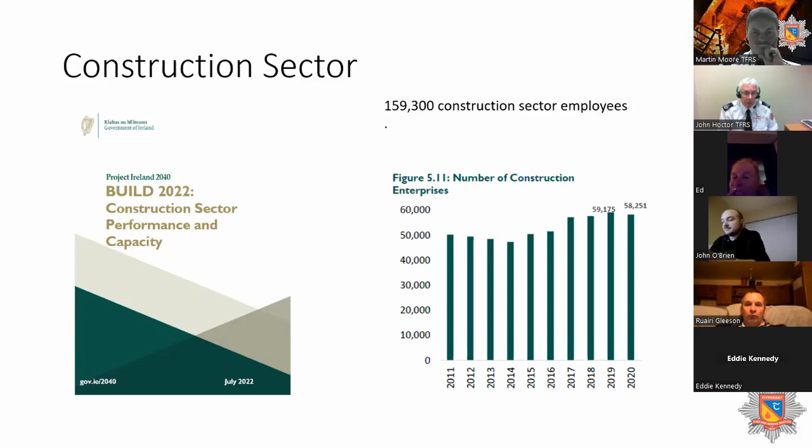A little bit of history in terms of regulation. There's nobody here who would want to talk regulations as their favorite subject, but I've taken London as an example. In the 12th century, there was a major fire, and they banned thatch roofs within the city boundaries. 400 years later, in 1666, they had another big fire, and they banned timber construction within the city boundaries - all houses had to be built in stone and brick.

By the 1850s or 1860s, they had typhoid and cholera outbreaks in London, and they brought forward more regulations around sanitation and water supplies. They brought in a full suite of regulations for not just London but all of England in 1966, and they stayed in place with some exceptions and increases. But then in June 2017, Grenfell Tower happened, and there were 72 fatalities. Coming out of that, five years later, they've enacted a Building Safety Act, and a lot more statutory instruments and guidance.

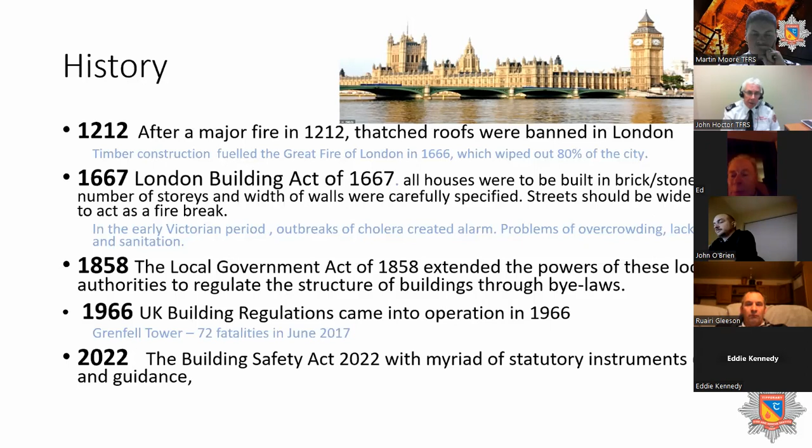Grenfell Tower was a large, complicated building, and what we're really talking about here tonight are dwelling houses, and that's really the focus here, but it gives you an idea of where regulations have come from.

The other issue is that regulations aren't just in Ireland and England. If you go to any developed economy, whether Europe, Canada, America, Australia, they all have regulations, and they all have the same type of regulations. On occasion, we'd look at fire regulations in some of those jurisdictions that are quite similar. But it's not just within the developed world.

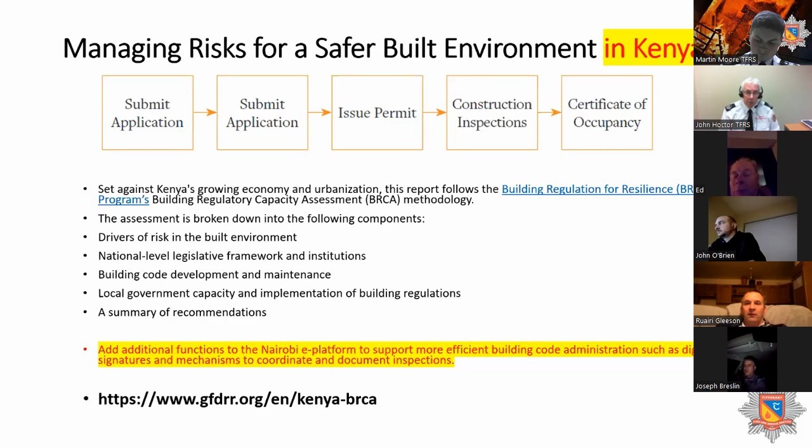Take Kenya, for example - this is a World Bank report. Their process: submit the application, issue the permit, construction inspections, and cert of occupancy. They actually have an e-platform, a BCMS equivalent, in Nairobi to allow people to go along and lodge documents and document inspections. So building regulations are part and parcel of what's happening worldwide.

In Ireland, we were slow in terms of bringing in regulations after the state was founded. We brought in planning permissions back in 1963, and then in 1990, the Building Control Act was enabled. These are Irish regulations written and passed through Dáil Éireann, for Irish people - they're not being put together by somebody from the outside.

Building control regulations cover the fire safety certificate, the commencement notice, disability access cert, and since 2014, the certificate of compliance on completion for all buildings, with the exception of the opt-outs for dwelling houses and agricultural buildings. Building regulations are a set of expectations in terms of fire, structure, hygiene, access, and then there are technical guidance documents that give details of what should happen on the ground in terms of buildings.

The regulations, if you go back 400 or 500 years ago in London, were very prescriptive. No thatched roofs, no wooden structures within the city of London. That's now changed, not just in that jurisdiction, but right around the world. They tend to be performance-based. So you can now have a thatched roof in Ireland, but it has to be 6 meters from the nearest building. So the regulations are more performance-based. It's not simple black and white rules anymore.

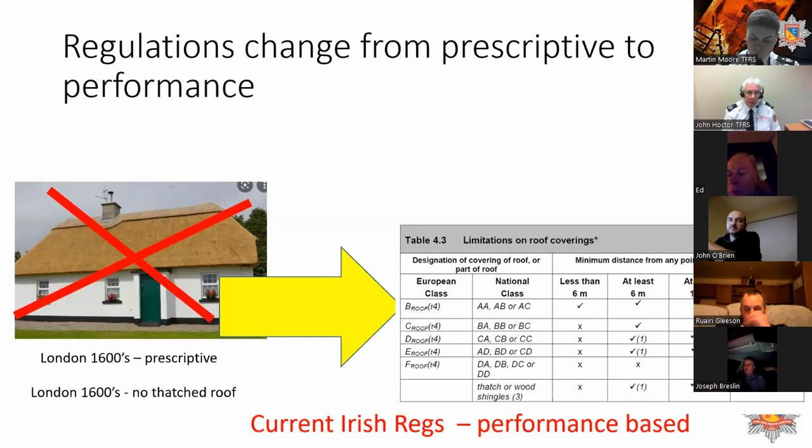Why are we doing this? And Dave mentioned it as part of his introduction. In Ireland, we had historically 40 to 45 to 50 deaths a year. We're now down in the late teens, early 20s.

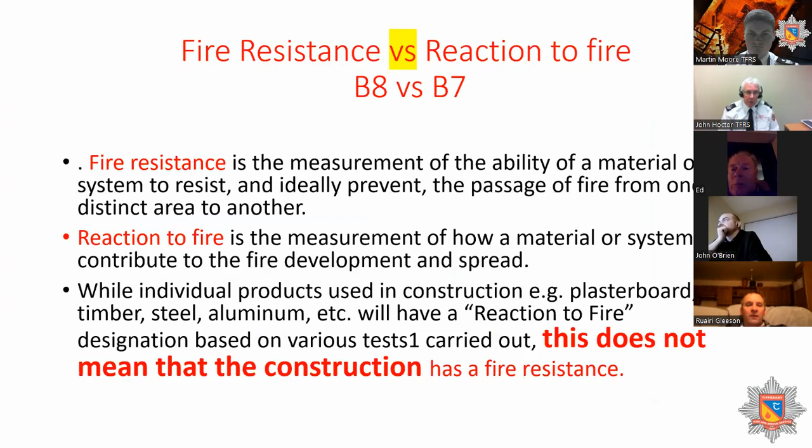Building reaction or fire resistance, fire reaction. There's definitions here, but I'll go on to the next slide to talk to it. Our concern is, not merely talking to professionals in the construction sector, but when we go out to do licensing inspections in the hospitality sector, they tell us something is fire rated. The reality is it either has to be fire resistant or have a reaction to fire.

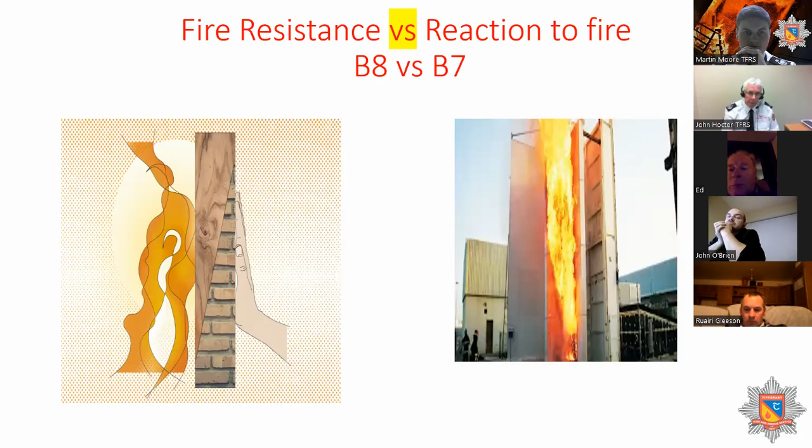Fire resistance is essentially that the wall will either withstand the fire for a duration, stop the flames coming through or the smoke coming through, and stop the heat coming through. Reaction to fire is that if you light a fire lighter at the bottom of the structure, if it's made of concrete, the fire won't go up along the structure. If it's polyurethane or PVC, like it was inside Grenfell Towers, the sad reality is the fire has traveled very, very fast.

So a little bit more detail here in terms of the actual fire resistance. It's not just fire resistance, there's a designation of resisting in terms of load bearing capacity, integrity, and insulation. Load bearing capacity means that if the fire is here, the wall will stand for 30 minutes or 60 minutes and won't collapse, but it doesn't mean the fire won't go through the wall. If it's got integrity as part of the designation for 30 or 60 minutes, the flames won't pass through the wall, or the hot gases or smoke won't pass through, but you will still get some heat transmission through the wall itself.

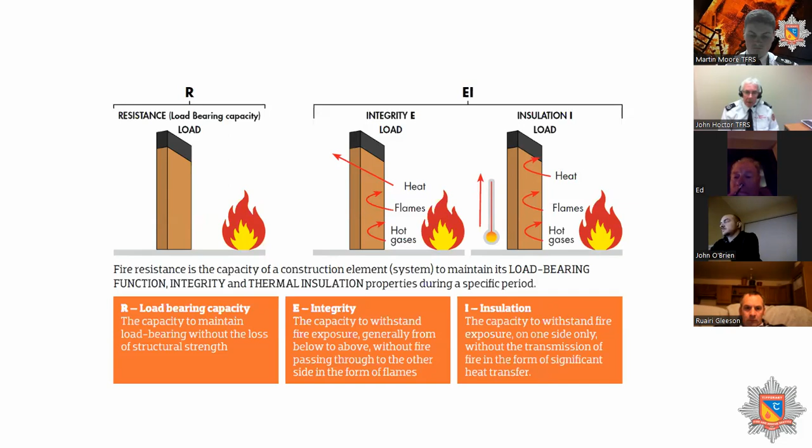The last one is, if it's got an insulation rating, the hot gases will be held back, the flames will be held back, and the heat will be held back. So on the far side of the wall, you would be actually unaware the fire was happening because of the integrity, insulation, and resistance of the wall itself.

In terms of reaction to fire, again, it's not just simple, it's fire rated or it's got a fire reaction rating. A1 is non-combustible, so it could be plasterboard or a concrete block. And then you've got polyurethane and polystyrene. And all the way in between, you can use them in some circumstances, but the regulations tell you when you can use them, when you can't.

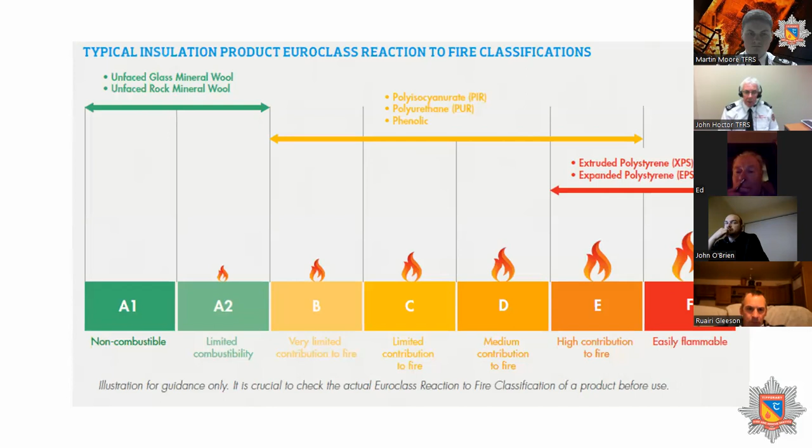So in terms of looking at the actual fire, particularly for dwelling houses, I want to step back and use a different analogy. Take a Scania tractor unit that's bought from Scania, that gets converted into a fire appliance. The way that runs essentially is that the tractor unit is purchased and it then goes to a bodybuilder who puts in the water tank, the lockers, the pump behind it, as well as putting in space for ladders on top.

If that's done in Ireland, it has to be built by an approved vehicle bodybuilder scheme, governed by the NSAI, the National Standards Authority of Ireland. They've got a code of practice, purchasing requirements, drawings, and control plans. The detail is here on it.

I suppose what I'd be suggesting to you essentially is that the construction sector is becoming more and more like an assembler of approved items rather than building from scratch.

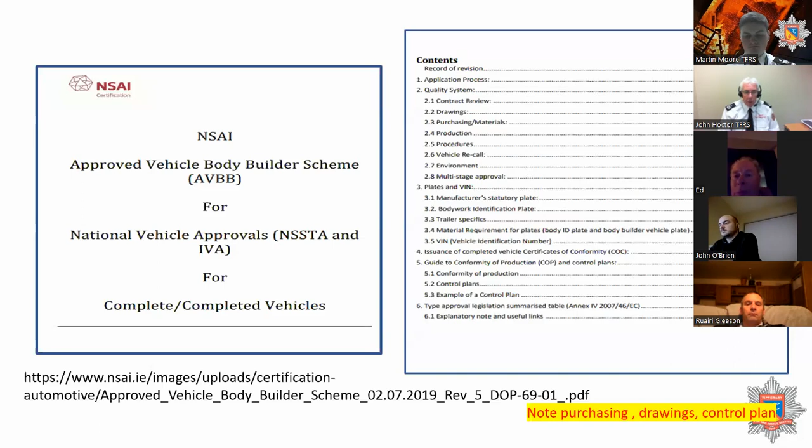So the technical guidance documents, there's a lot of documentation out there, and we're very conscious of that within the actual sector. Within Ireland, we've got 12 guidance documents, A for structure, going down as far as M for disability. We're going to talk about one of them here, which is technical guidance document B, volume 2, building regulations, technical guidance for dwelling houses. The link is here if you want to take a look at it.

In terms of volume 2 for technical guidance document B, if you follow the guidance in this document, you've got prima facie compliance, legal compliance with the actual building requirements. It's a bit like the seatbelt - if you put on your seatbelt, you're obeying the law. Again, if you follow the guidance here, you're obeying the law. And it's a minimum standard, so nothing precludes you from going higher than that.

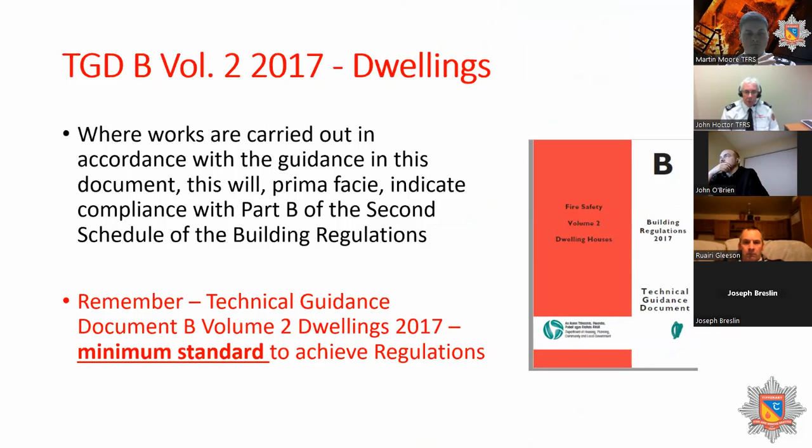What's in the document, and these documents run to about 100 pages, so the 12 documents could be 1200 pages of guidance documents. There's 5 sections, B6 to B10. B1 to B5 are for commercial buildings, so we're just talking about domestic dwellings here, covering B6 to B10. B6 talks about there has to be fire detection now within buildings.

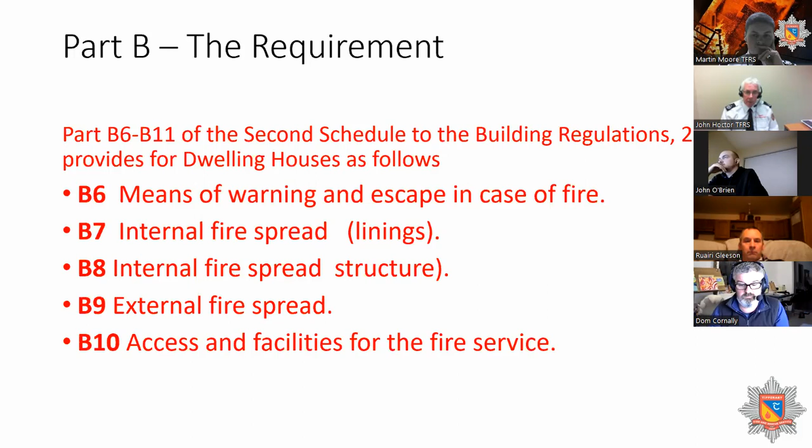There has to be means of escape, not just windows, but doors. The internal linings - you can't go along and have polyurethane as internal linings because it'll let a fire spread very easily. In terms of structure, the structure has to have integrity in terms of standing, and if there's cavities in that structure, it has to make sure cavities don't allow the fire to travel very easily. External fire spread, for example a thatched roof, you have to be sure that what we're building won't allow the fire to spread rapidly to other dwellings. And finally, access to the fire brigade.

On top of that, there's what's called supplementary guidance. If all houses were built of stone construction like they were maybe in the 17th or 18th century, they were very fire resistant. Today we're using a lot of timber framed and modular construction. This guidance here gives you supplementary guidance on how you should comply with the actual technical guidance document. And if you build in accordance with this requirement, then you're in accordance with the European test methods - all the guidance here has actually got detailed fire safety testing within test houses right across Europe before it was published.

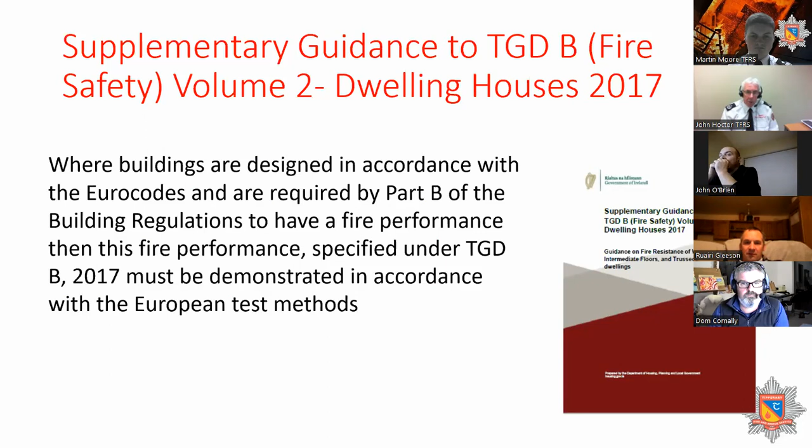In terms of fire resistance, which is probably our primary concern when looking at dwelling construction, there are probably 3 numbers people need to be aware of. The first one is REI 60 - that means there's a red line in the drawing typically, indicating 60-minute fire resistance for load bearing capacity, 60 minutes for integrity, and 60 minutes for insulation. Two other designations you'll see are REI 30/15, meaning 30 minutes for resistance and integrity and 15 minutes for insulation. And then the blue line is actually 30 minutes for all 3 - REI.

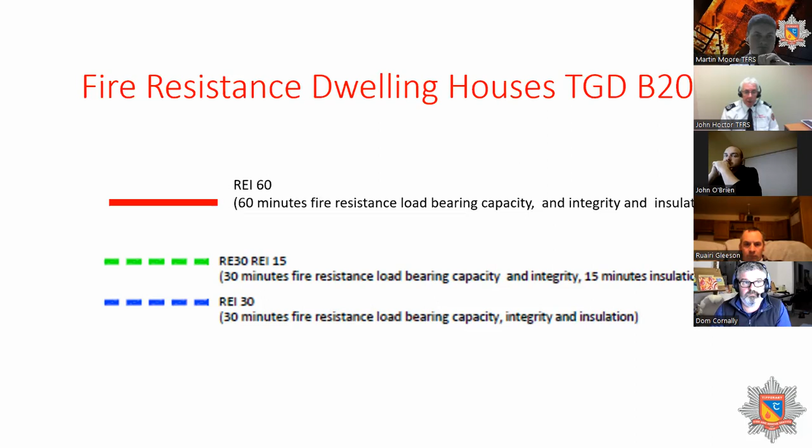So what does that look like? Take here a 2-bedroomed semi-detached house, entry door here on this side, sitting room, kitchen, and a stairs up to the bedroom. You then have a party wall here, and at the other side of the wall, another 2-bedroom dwelling. There's a red line down through the middle, indicating the party wall should be 60 minutes fire resistance for load bearing capacity, integrity, and insulation. If that's built out of concrete, you get that as part of the deal. If you're building a frame construction, using this guidance document tells you how to comply, so you get 60 minutes here. And I'll talk about the requirements if you step away from this document in a second.

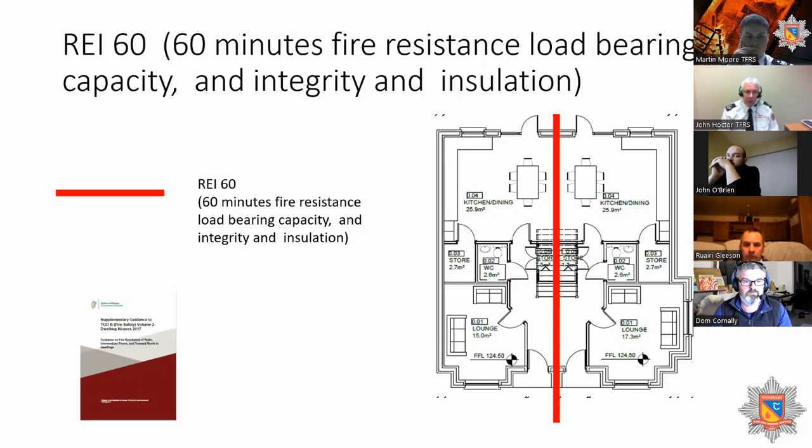If you've got a dormer bungalow, standalone, then there also are requirements here. You can see the dotted green line means you should have REI 30/15. So that means if the fire starts in the kitchen, the bedroom should be separated from the kitchen by fire resisting construction.

That should stop the fire from transmitting in terms of the load, the floor falling down for 30 minutes. It should stop the heat and smoke transmitting into the bedroom for 30 minutes. And then for 15 minutes, there should be no transmission of a warmer temperature up through the floorboards into the actual bedroom. That allows people to get out.

And you can see that requirement here is not just for the floor between the kitchen and the bedroom, but also in terms of the actual structure of the attic and the structure of the other bedrooms or other living areas downstairs.

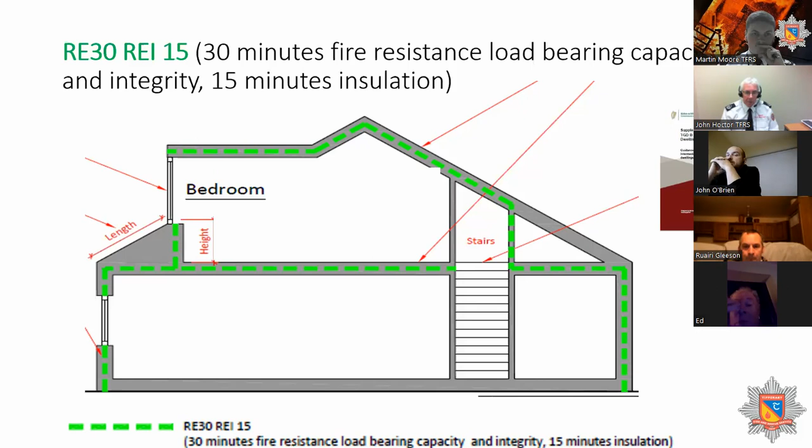So if we decide to step away from the ancillary guidance document for frame construction, or from concrete, then you're looking at substantiation. For concrete, it's very easy here.

This is an extract from one of the actual vendor sites. You can see here that if you use a 4-inch block, 4.5-inch, or 6-inch block, you get a 1 hour or 2 hour rating. And the key issue for concrete construction would be the cavities, making sure there's fire stopping in the cavities, and then the openings, which Martin will talk to, because if you actually start opening up the walls or floors, that causes problems in terms of fire transmission.

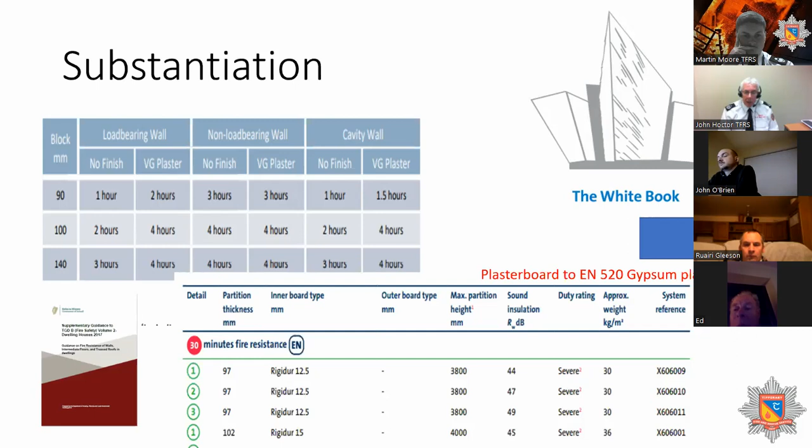If you've got stud construction, then if you step away from this guidance document or ancillary guidance, you're into looking for substantiation from the vendors. This is a well-known vendor here, the White Book - 30-minute fire resisting construction, 12.5 mm board, and you can look at the substantiation behind it in terms of the stud build-up.

Posi joists, again, a lot more common within construction now because of all the ventilation and other ducting requirements happening in dwellings. This table is a bit detailed, but just to give you an overview, it's the fire resistant tests that have been completed.

You can see here on the left-hand side, they're all REI 30, so they're all getting 30 minutes across all 3 characteristics for fire resistance. If you go over to the right-hand side, you'll see the actual tests have different times in them. This test here was done at 55 minutes before it actually stopped without failure. This one achieved 36 minutes, and this achieved 42 minutes.

But the difference here is that the testing on the top line was done to BS 476. The testing in the bottom line was done to EN 1365. And the key issue essentially is that the new standard requires us to build dwelling houses in accordance with EN standards. The BS standards are only there for existing dwellings.

And if you look over here, it gives you details in terms of joist centers and the joist depths, and then the screw fixings. And the report is over here - so there's a substantiation report that actually goes through here.

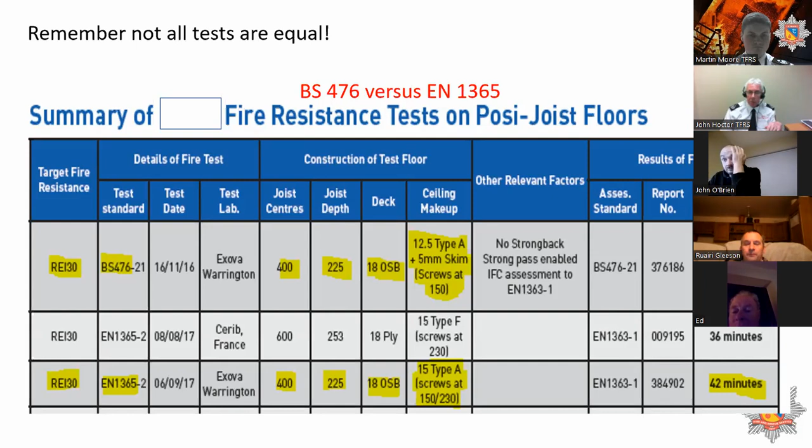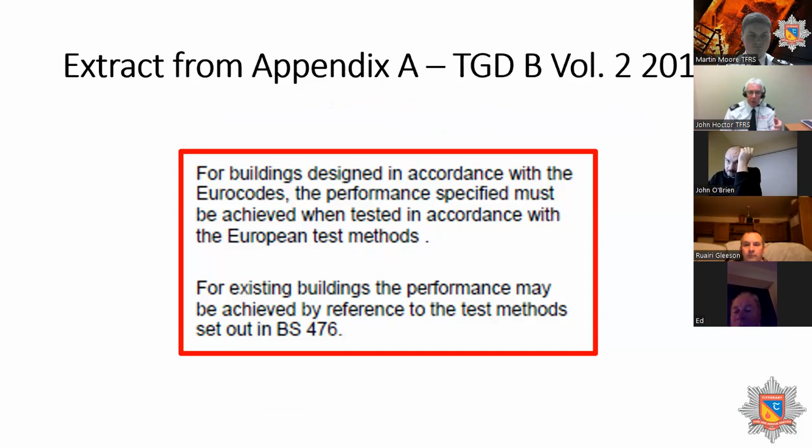This point here, I think I already made, that new dwellings are to Eurocodes, existing dwellings are to the old British standards, the 476 testing. So a test report, and again this applies if you're stepping away from the supplementary guidance - you've got to go along and look at the details.

This is a test report that was done in a test house in the UK. It was done in accordance with the European standard 1365. It was looking at a timber floor with downlighters, with a 15 mil slab, 225 mil joist at 600 centers, with 22 mil tongue and groove chipboard above. And then they put in 7 downlighters into it.

And I suppose the key issue here in terms of fire safety is that if you go along and put in a concrete floor, you can say you get 60 minutes. When you start putting in frame construction with downlighters, the only way you can prove that is by bringing it to a test house and showing that it actually works.

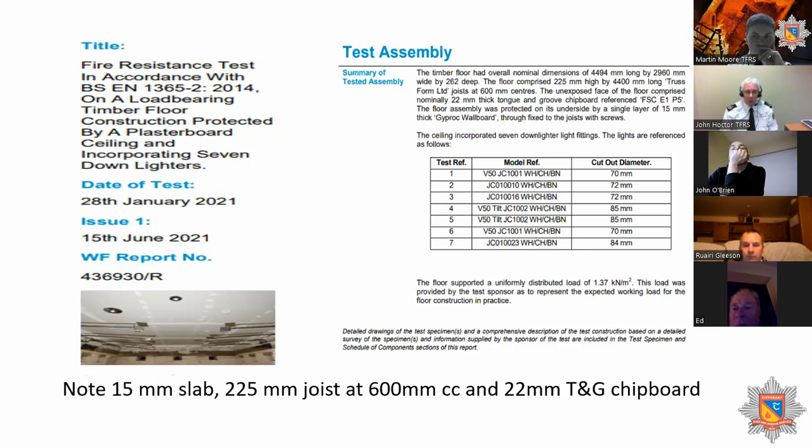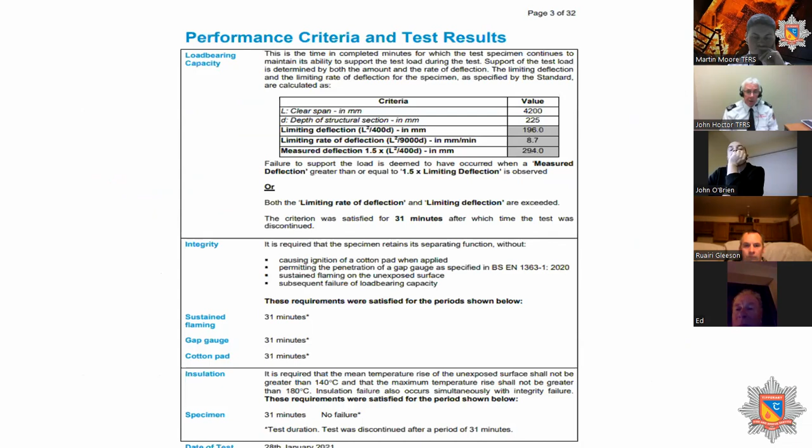So the test report here shows that it passed load bearing capacity at 31 minutes. It passed the integrity requirements at 31 minutes. And it passed the insulation requirements at 31 minutes. So the detail is there. The report runs to 32 pages - I've just taken a sample out of it. And this is the sign off on it.

And one of the key issues here is that you can't take a report in isolation. You need a full report, and the link is there. And you only need to go to this level of detail if you step away from the guidance that is provided in the supplementary guidance.

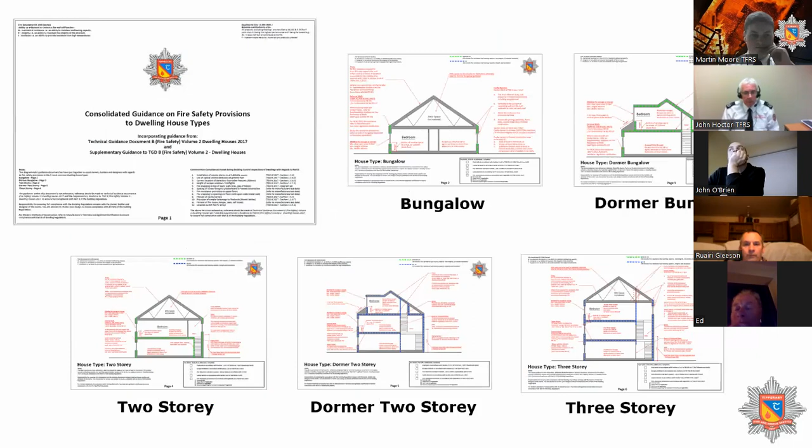So that concludes my regulatory overview. What I'm going to do now is hand you over to Martin Moore, my colleague, and he'll go through some of the actual on-site technical specifications. Thanks, John. As John said, I'll share my screen with you here now, guys.

So as John has alluded to, he's gone through the regulatory pieces and the test information. What I want to get into now is the nitty gritty of it, the technical advice with regards to the details, the junctions, the fire stop, and how all that goes together.

So if you have any questions as we go on, please use the chat function here in Zoom and ask us whatever questions you want, or contact us afterwards. Anything we can't answer during the Zoom call, we'll come back to you with an answer.

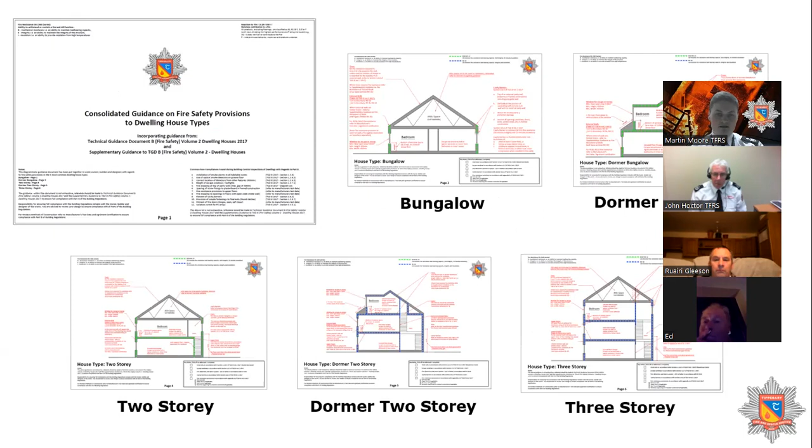As Dave alluded to at the start of the presentation, what we've been working on is a consolidated guidance document for Technical Guidance Document B, Volume 2, and for the supplementary guidance. There's a substantial amount of guidance out there, and it's knowing where to find it that you can get bogged down in. So the idea behind this document was to streamline it all.

You will effectively just have to go to this document for the most common house types we see in Tipperary, your bungalows, dormer bungalows, two stories, dormer two stories, and three stories. It will effectively tell you what type of fire resistance you need, what kind of escape provisions you should be providing.

The idea was to create something similar, almost like the ACDs. I suppose they're not exactly details, they're diagrams of the houses, but I think we all kind of think in that way. It's quite a handy little fact sheet that you can hand off to subcontractors or other designers and say, this is my bungalow, these are the base level fire safety provisions that I need to be providing.

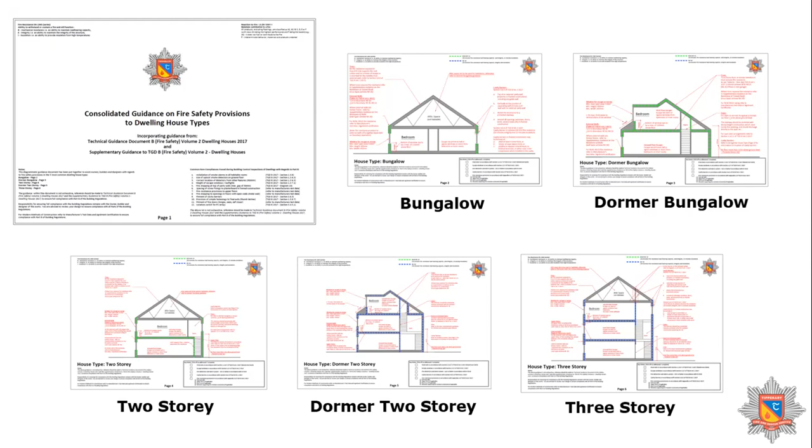So take, for example, the bungalow dwelling. Obviously you've got a truss there that's not doing anything in terms of a means of escape, and we're assuming it's not supporting the external walls, so it doesn't require fire resistance. You've got your external walls — in a bungalow situation, if you're more than 1 meter away from the boundary, RE30, REI15 is adequate.

Now, even when it comes to the supplementary guidance, any of the scenarios, the wall types, truss types, or floor types tested, they all achieve REI 30 — the full 30 minutes fire resistance.

TGDB is lacking in terms of RE30, REI15 — there's not many manufacturers out there even going to provide you test certification for that. They're all going to aim for the higher value, purely based on the cost of the tests involved. So the majority of results and build-ups out there will actually achieve the full REI 30, but it's always worth checking.

So if you are wondering what does achieve RE30, REI15, talk to the manufacturers, check out the Agrément certificates for the products you're planning on using. As I said, these are not going to catch everything — they're the base level of fire safety. You still need to review Technical Guidance Document B Volume 2, and the supplementary guidance, but this is just to give you a very quick overview of when you need cavity barriers, when you need to look at fire resistance of external walls, items like that.

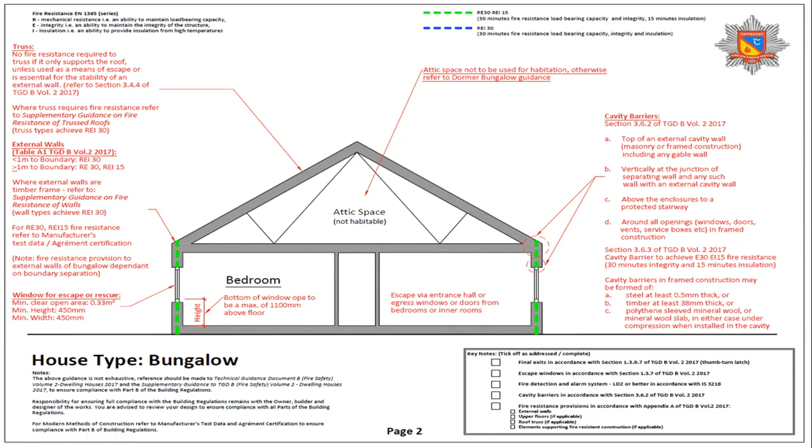Go on to our dormer bungalow.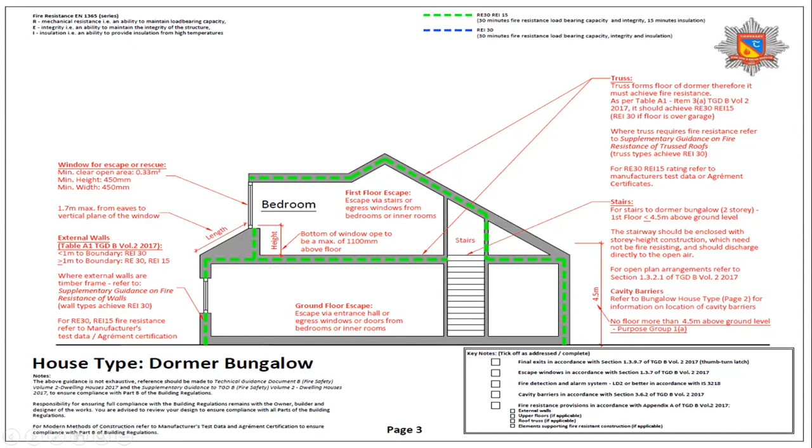And again, we're talking about what kind of protection to the stairs you need in a 2-story dwelling or a dormer bungalow. Really, all you need is that the stairs be enclosed in story height construction, which need not be fire resisting. There are open plan arrangements, and I'm referring you back to section 1.3.2.1 of TGD B Volume 2 for guidance on where that can be used. So again, 2-story dwelling, very similar to the dormer bungalow.

So this slide is probably one of the most important of the presentation. The devil is in the detail with everything you do in terms of fire safety. You could have 3 layers of plasterboard onto a timber frame wall, or a standard blockwork wall 215 millimeters thick, and happy days. But as soon as you start puncturing holes in that, joining it with something else, or creating cavities in it, the devil is in the detail, and these systems can completely fall apart very quickly, regardless of how thick or dense they are.

If the junctions aren't done right, if the fire stopping isn't done right, and if the cavity barriers aren't done right, it all falls apart. So this needs to be communicated down to site. You need to generate generic details for junctions, fire stopping, and cavity barriers, especially with regards to specifying systems. If you're specifying a timber frame house or a lightweight metal web or metal frame structure, do not leave it off to the manufacturer.

The manufacturer will develop stuff for the structure for you, but you are going to have some bespoke details with regards to the junctions, the fire stopping, and the cavity barriers, because the dwelling or development you're creating, the house types, are going to be specific and unique in their own right, with their own issues regarding how junctions are going to fit.

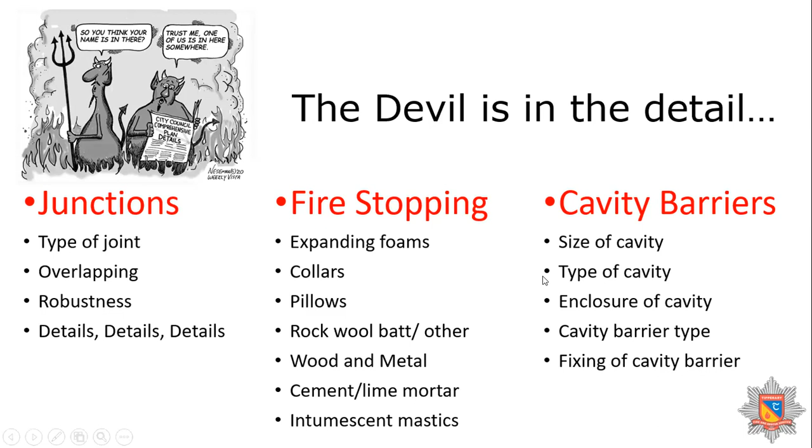The other thing, in terms of cavity barriers, you have to look at the size of the cavity, what's the type, what enclosure is on the cavity, what kind of cavity barrier you're using, and probably most importantly, the fixing of that cavity barrier, so that it's going to actually perform and do its function if a fire does happen.

So just to talk through some very key critical junctions that we're seeing in terms of building control inspections that need to be picked up on. So you take your party wall junction now, and I'm talking more in framed construction here, your lightweight metal frame or your timber frame developments or houses, whatever you're doing. The party wall is a critical junction in terms of the vertical separation between dwellings.

What came out when the supplementary guidance document was published with regards to timber frame dwellings is that party walls must now be constructed in the factory if it's a frame type system. If it's a block type system, no problem, there's no issue there. But if you've got a frame type construction, the party wall has to be constructed in the factory.

So what we'll often see is you might take the attic panels, with two spandrel panels connected together in the attic, providing fire resistance across the party wall line. How does that joint get fire stopped? Because effectively you've got double lapped fire line boards on all the panels coming from the factory. But when they're butt jointed to something like the rear annex in a dwelling, or those two attic spandrel panels, it's fine at floor levels because the floor joists block off the joint. But where you have vertical joints or horizontal joints outside of that have to be thought about.

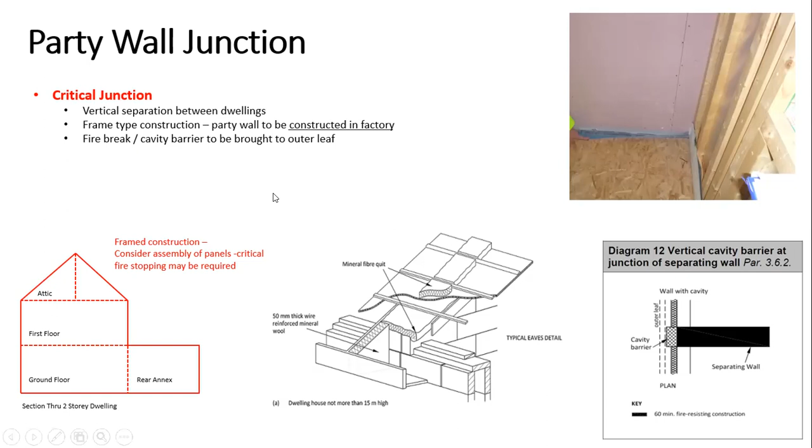Another big aspect is our roof truss fire resistance that hasn't really been thought about until maybe the last 2 years, when it was added to the supplementary guidance document. Because a roof truss acts in uniform, as one unit, and the timber members are so small, you have to consider providing fire resistance to the entire truss where it's required.

So there's probably 4 typical scenarios where fire resistance is required to a truss. It's required where you have a protected stairs, let's say in a 3-story house, and the stairs go up and interact with the roof. You're either providing a fire resistant ceiling throughout the entire upper floor, or looking at how the stairs go up and whether it connects onto the sloping part of the roof, and then fire resisting the truss to suit that.

Again, very importantly, when it comes to modular construction - your timber frames, your metal, lightweight metal frame construction - if the roof is providing some sort of structural resistance or structural lateral stability to the external walls, and if that roof collapses and takes down the external walls, and they're required to be fire resisting, then the entire roof truss should be provided with the same equivalent level of fire resistance as those external walls.

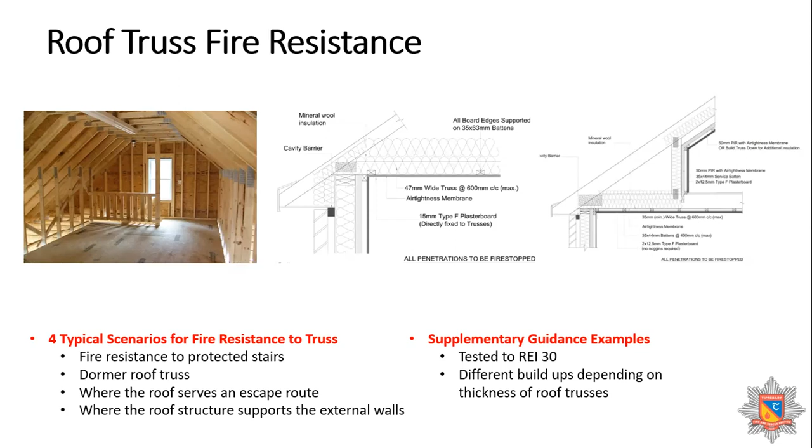So you see there are just two extracts from the supplementary guidance. They're broken down into a 47 mil wide truss and a 35 mil wide truss. Depending on the width of the truss, it determines the level of fixings, the depth of the fixings, and the security of the fixings. What you're looking at most of the time is probably a 15 mil minimum wall type A board, but in most cases it's even a type F plasterboard. As I said earlier, any examples given in the supplementary guidance are all tested to the full requirements of REI 30, and it depends on the different build-ups based on the joist's width.

So what you have is your two options: you bring up your cavity barrier in the roof space to close off the roof space from above the protected stairs, or you provide a fire resistant ceiling throughout the entire upper floor. But if you're providing a fire resistant ceiling, every opening through that ceiling has to be fire stopped. So any spotlights, downlighters, mechanical ventilation systems, soil vent pipes or ventilation pipes - anything at all that goes through that plasterboard - has to be fire stopped to maintain the integrity of the protected stairs.

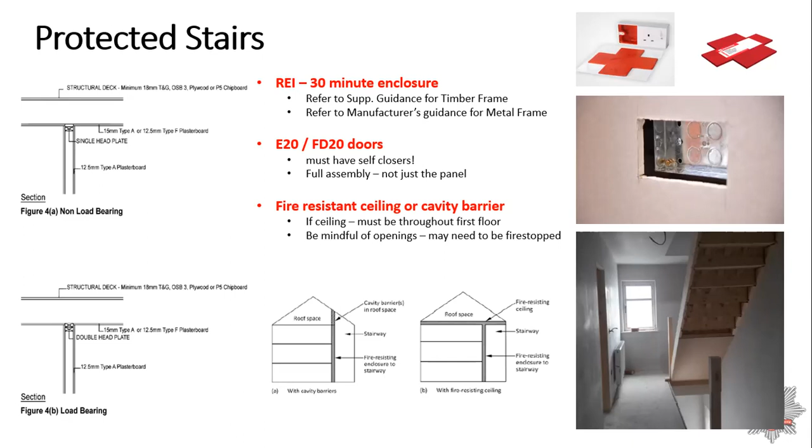So fire doors - what you have called up in Technical Guidance Document B is FD20 and FD30S doors. FD20 to the enclosure of protected stairs, and FD30S between the dwelling and any attached garage. So you're going to struggle to find an FD20 door - they've kind of been phased out by the industry. The main difference really between FD20 and FD30 is the intumescent seals. In the majority of FD20 doors, you didn't need the intumescent seals, so you're completely reliant on the gap between the door panel and the door frame being as minimal as possible. Because of site tolerances and things like that, that's very difficult to achieve. So because of that, the industry has just moved on to providing FD30 doors.

The problem is, if you go onto any builders merchants websites, like the extract I have there, they are just selling you the panel. But you should always request supporting documentation with regards to the test certs. Because if you have a client that wants to put a particular set of ironmongery onto a fire door, that ironmongery might not have been tested with that door panel in a particular type of frame, in which case you've now compromised the entire door - and it doesn't matter that they're calling it up as an internal half-hour fire check door. If it's not done in accordance with the test certificate, you're exposing yourself.

So it's just to be aware that a fire door is not just a panel, it's an assembly, a door set. It must have certification demonstrating it's tested as such. You can't just have a panel and say the panel is a fire door. Everything works together: the closer, the hinges, the ironmongery.

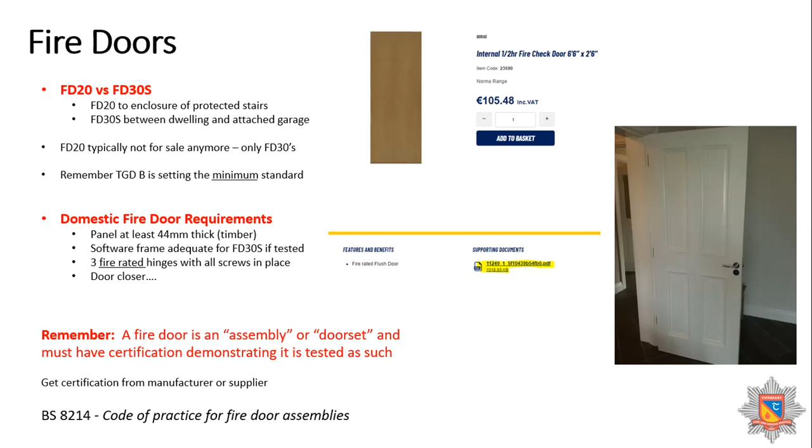So what you'll find with 30-minute fire doors, they're at least 44mm thick. The softwood frames are fine. You'll have 3 fire rated hinges, and the door closer again has to be included. Just to be aware for yourselves, BS 8214 is the code of practice for fire door assemblies. Very, very good guidance document to go through and be familiar with for your own knowledge.

So this is just an extract from test documentation on fire doors. You see the actual level of detail these test documents go into, in terms of a number of different frame types, different locks and latches, hinges, door closers, all the ironmongery and different furniture for the door in terms of glass and everything will all be detailed in that

test documentation. So what you need to be very aware of is: am I lining up? Does my door handle and my hinges line up with the panel I've selected and with the frame I have? And if all that lines up together, then you can 100% stand over and say this fire door is in accordance with this test certification and you've done your job correctly.

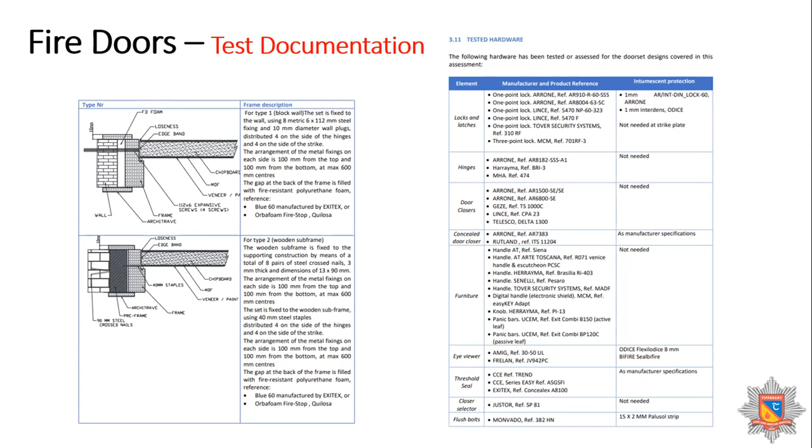So I want to show you a very quick video. Again, it's something we use in our community fire safety talks, and it's about the importance of closed doors. A lot of people tend to disable self-closers and things like that. If the door isn't closed, it's not performing its function. It's not doing its job.

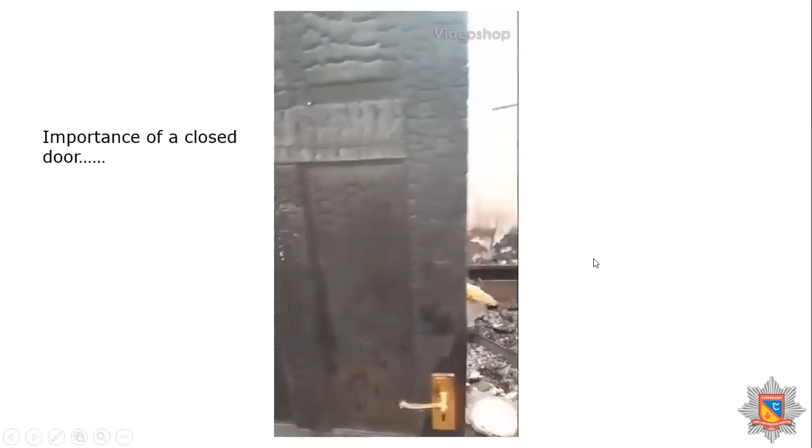So even just something as simple as a door, in this scenario in a domestic setting, this is a video we put up on our Facebook page a couple of years back. It was a house fire our Clonmel Brigade had attended. I just want to talk you through the video. So you see there, that's the fire side of the door. I think it was a door between a kitchen and a garage or something like that. Completely charred, completely destroyed. This is just a standard panel door, nothing special about it, not a fire door or anything like that.

And there's the accommodation side, the opposite side of the door. Because the door was closed, it gave the occupants a chance to get out, and had a significant impact on the escape provisions in the dwelling. So it's important to be aware of that.

Now, just to move on. Again, John alluded to this in terms of the metal web floors or the posi joists that have become hugely popular in recent years because of the amount of ventilation systems, downlighters and services that were passing through floors, compared to previous generations where you had solid joists.

So what you see on the left hand side is actually a test assembly for the metal web floors. Every single downlighter has a hood, and every one of the diffusers for the ventilation system has a damper, as shown on the right hand side, or it has a fire collar on it. That's the level of fire stopping that's required with these floors.

The problem is, if you only provide a 12.5mm fire line board, it will not achieve a 30-minute fire resistance on these floors. The metal web melts at very low temperatures in a typical house fire, and you get an image like what's up there, where it's just basically the timber top chord and bottom chord left. So it's about being very aware that you need at least a 15mm type A board, or type F board, but type A as a minimum. A 12.5mm type F board will not achieve the required standards under the EN test standard 1365.

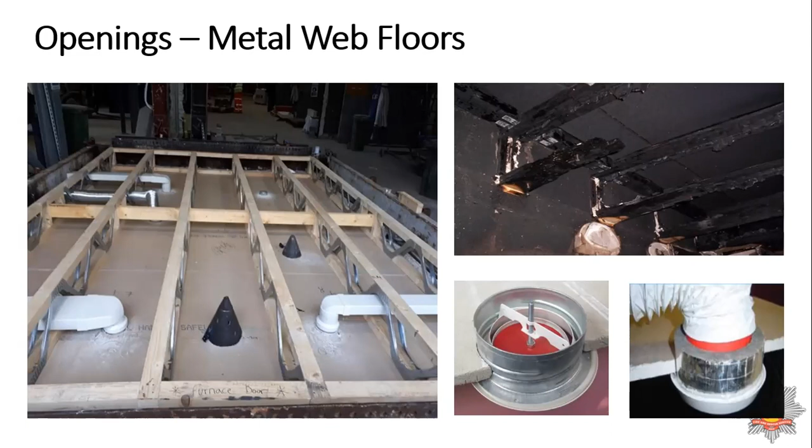So just to be very aware of that: 15mm type A, and every opening through that board has to be fire stopped. The entire floor system is dependent on that plasterboard layer and the fixings going through into the joist to provide that structural protection in a fire scenario.

Socket outlets are a big gap I find in the knowledge in Technical Guidance Document B, and even in the supplementary guidance, they're not really explained very well. It just says that all sockets and stuff like that should be fire stopped. So we've done a bit more digging on this, and I've gotten feedback from the department as well.

With regards to framed construction, what you're looking at is separating sockets out between stud voids. You should not have back-to-back sockets where you require either 30 minutes full fire resistance, or RE30, REI15. You want to separate them out, each socket in each stud void, whether metal frame or timber frame, and you cannot have anything bigger than a double socket in one void. If you do, you need to look at fire stopping the socket itself, like with the fire putties you see in the bottom left of the screen.

The other thing to be very aware of is it has to be a metal backed socket. Plastic backed sockets are not accepted, and they haven't been tested. What has been tested is metal backed sockets, with the socket in its own individual stud void within the build-up. If you can do that, you will achieve the required fire resistance of REI30 or RE30, REI15.

Another good document out there is BS 8313. It talks about the accommodation of building services and ducts and stuff like that. But what it specifically says is that a risk assessment should be conducted where you're putting services into a wall that requires fire resistance. Just something to be aware of.

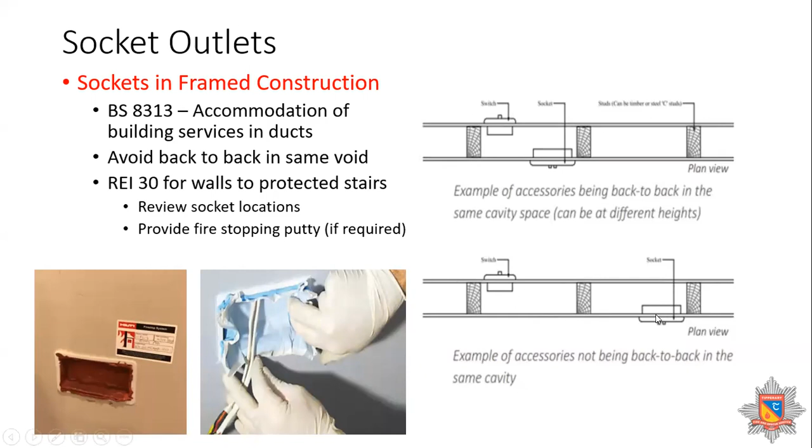But the biggest thing is avoid back-to-back sockets in the same void, and make sure that if you're going with more than one socket in the same void, it needs to be fire stopped. So this is a perfect example of the devil not being in the detail, or being in the detail, depending on what way you look at it.

This was a protected stairs that had back-to-back sockets in the same stud void, and it broke through from the living room straight into the stairs and compromised the whole thing. You can see that lovely fire door there in the background - it didn't even get a chance to perform its duty, because the wall on the opposite side of the stairs failed based on sockets being in the same stud void.

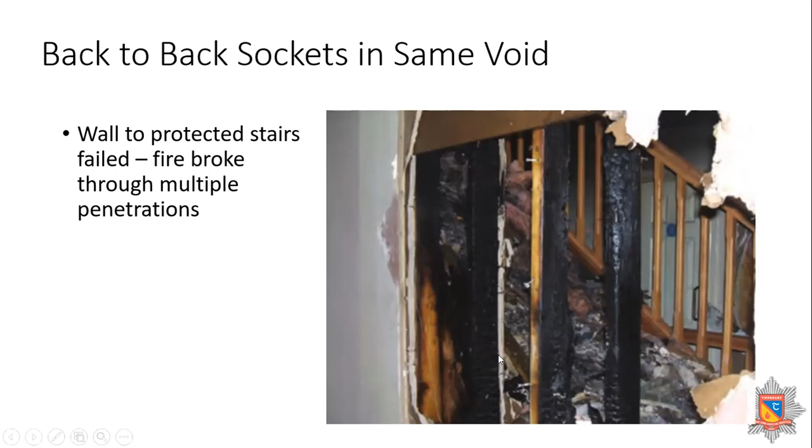Just something to be very aware of with regards to fire stopping limitations. There's a bad job being done in terms of advertising fire stopping foams and fire rated foams and all this kind of stuff.

That's just a little extract from a fire rated expanding foam, saying it'll achieve 120 minutes of fire resistance. It is tested, which is great, fantastic. It has approval, it has all the certificates, but just because of that doesn't mean it's going to be suitable for every single void you come across that needs to be fire stopped.

That might be fine for a 10 or 15 mil gap around a door frame, between the door frame and a concrete wall or block wall. But it's not going to seal up, or perform to the same level, if you're trying to seal a 200 mil core hole with that product. You're into more significant forms of fire stopping then, whether it be cement and lime mortar, or a mineral wool, reinforced mineral wool, an intumescent paint or something like that. Just be very aware of what's suitable for what voids.

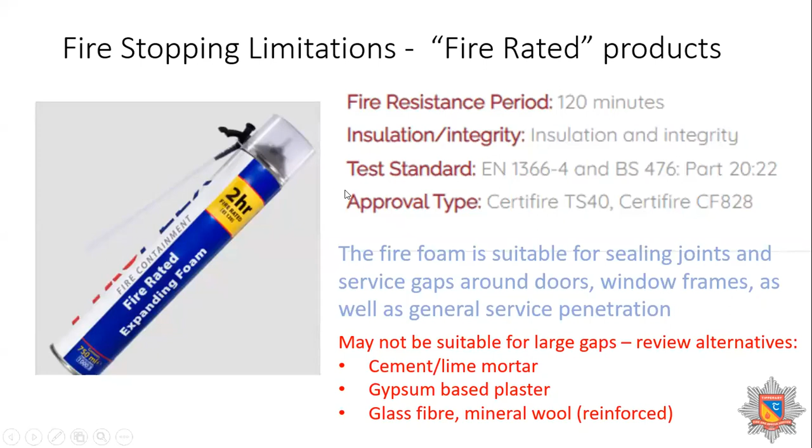What you'll see on the next slide is - that was a very bad example on the left-hand side of absolutely no fire stopping whatsoever. It looks like he tried to put his boot through the block wall to put in the cabling. Similarly there with the pipe work going up through a concrete floor, a collar should have been put on that.

There is a fantastic document brought out very recently after the whole Grenfell disaster in the UK called the Fire Stopping of Service Penetrations, Best Practice in Design and Installation.

So it was a collaborative approach by a number of different institutions in the UK, and it's a very good, accessible document for builders and designers to show them what kind of fire stopping is required in what situations, and what product is best suited depending on the wall size and the cable trays or pipe work going through it, and how best to do it. I'd recommend anyone to just give that a Google. It's free to download, no requirement to be subscribed to NSAI or anything like that.

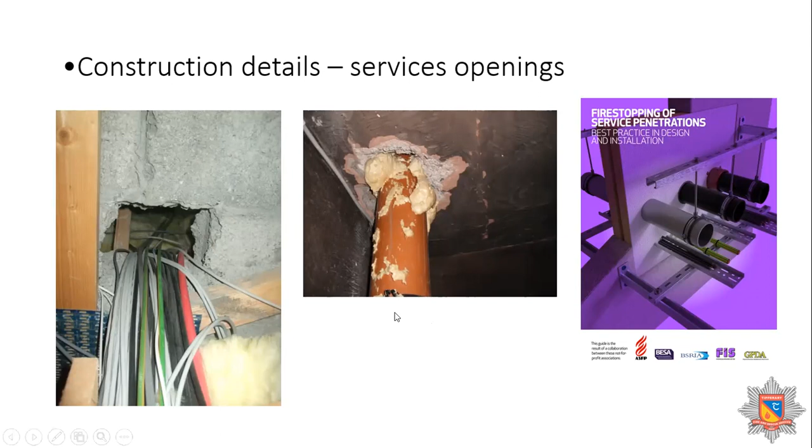To talk very briefly then about cavity barriers. There was significant changes in Technical Guidance Document B Volume 2 with regards to cavity barriers over the original guidance document, TGD B 2006. In Volume 2 2017, diagram 17 - if you remember that from TGD B 2006 - was actually taken out, and I have a feeling it'll probably be taken out of the next iteration of the Technical Guidance Document B for the commercial side too.

But effectively now, instead of a cavity being diagram 17 compliant, what you need to do is provide a cavity closer at the top of all external cavity walls. Doesn't matter if it's masonry or frame construction, and that includes any gable wall. So you have to provide some sort of cavity closer at the top. Now that needs to be balanced with Technical Guidance Document L, because we can't have a block or flat bridging across the cavity, or a fiber cement slate that bridges across the cavity and creates a cold bridge causing mold and dampness on the inside.

So what you're looking at is proprietary systems to close off the top of the cavity in masonry construction. I think it's probably not gotten onto sites as quickly as it should have, but it's something to be aware of as designers and builders, that there is a requirement there to close off the cavity.

If a fire breaks into a cavity - because let's be honest, the PVC window is going to melt relatively quickly in a fire scenario - that fire is going to get into the cavity, and if there's no stopping between the wall cavity and the roof space, it's going to rapidly get into the roof space, and it's going to become a very, very enveloped house fire quickly in that scenario. So it's just something to be aware of.

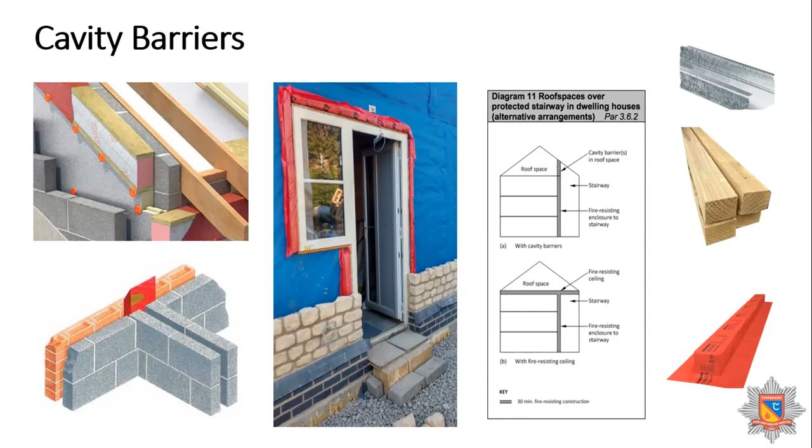Now, something that's come up a few times, and I've been looking for clarification from manufacturers on this regarding insulation - there's a misconception out there that because you are providing full fill insulation in the cavity, you do not need cavity barriers to close off the top of the cavity. If you actually go to the Agrement certificates of any of these products, whether board insulations or pumped bead insulations, what they will say is that cavity barriers should be installed in new buildings in accordance with Part B Volume 2 Clause 3.6. That's what I just read a few minutes ago regarding closing off that cavity at the top - if it's a masonry cavity wall, you need to have a cavity closer at the top of that to ensure fire does not break through from the cavity into the roof space.

There is an argument they try to provide saying that if a fire breaks into an unventilated cavity, the amount of air will be insufficient to support combustion and flame spread. The problem is, especially with beads, any of the EPS boards are highly flammable and combustible. Fire will track very quickly in there, especially if a window falls out. PVC melts at low temperatures, giving fire free reign into the cavity. That bead will catch fire and track up. There is no test data to say an unventilated cavity will not support combustion - it's just kind of a spiel they have in it.

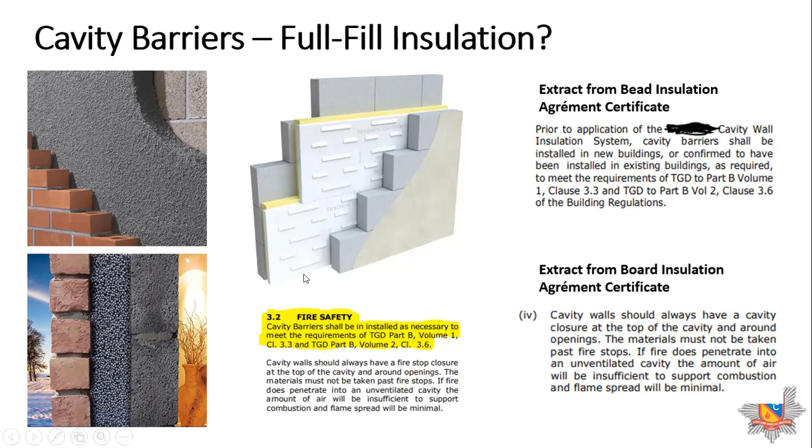At the same time, the Agrément certification, by the same manufacturers, says they should have cavity barriers or fire breaks in accordance with section 3.6 of Technical Guidance Document B Volume 2. So be very wary of that and cover yourselves on it.

Some key details regarding cavity barriers - again, if you're getting a timber frame manufacturer or a metal web or lightweight metal frame manufacturer on board, do not assume everything is going to be completely fixed and sorted in the factory. There are still going to be site details that need to be fixed and sorted out.

If you look at the left-hand image, it's a cavity barrier that was brought across and then stopped because of the support structure on a corner window within a timber frame house. That cavity barrier needs to run the entire way across, because if the window fails, which it will in a fire scenario, the PVC will melt at a very low temperature.

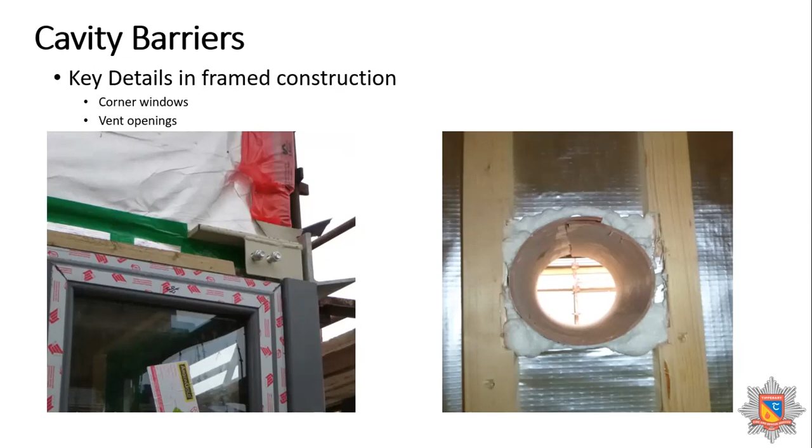A fire then has free reign into that cavity and can cause issues. On the right-hand side, they actually cored the background vents afterwards on site. Because they had done that and already had the blockwork walls erected, they didn't have a cavity barrier provided where the ventilation opening was going right through the cavity. The solution was to take out the plastic pipe they were sleeving it with and put in a 0.5 mil steel pipe instead. That 0.5 mil gets you the 30 minutes fire resistance required for the cavity, and it closes it off and makes it nice and tidy.

Finally, I want to talk about fixings. Just as important as looking at the devil in the detail with junctions, fire stopping and cavity barriers, fixings need to be taken very seriously with regards to how many there are, their spacing, and screw length. We can't just assume we can go to the builders providers and say throw me out a box of drywall screws and we'll bang it together - it has to be a very particular screw length.

The supplementary guidance document has, on the very last page, a fixings table that tells you, based on the wall types tested, exactly what screw length was used and what the maximum centers were for the perimeter and internal lines of fixings of those boards. Something to be very aware of - even on your own inspections on site, you'll see whether the boards look like they've been a bit mean with fixings, or whether enough have actually been put in.

For the walls, you're looking at 200 to 300 mil max centers for the boards. But when you get up to the floors and trusses, because they're horizontal and a flame will impact them more, the fixings are at 150 mil centers, and that has to be put in. Sometimes you might even need longer fixings - typically either 42 mil, 55 mil, or up to 60 mil. So be very aware that you could have 15 mil fire line board that does everything for you, but if it's not fixed right into the timber, into solid grounding, it's not going to work.

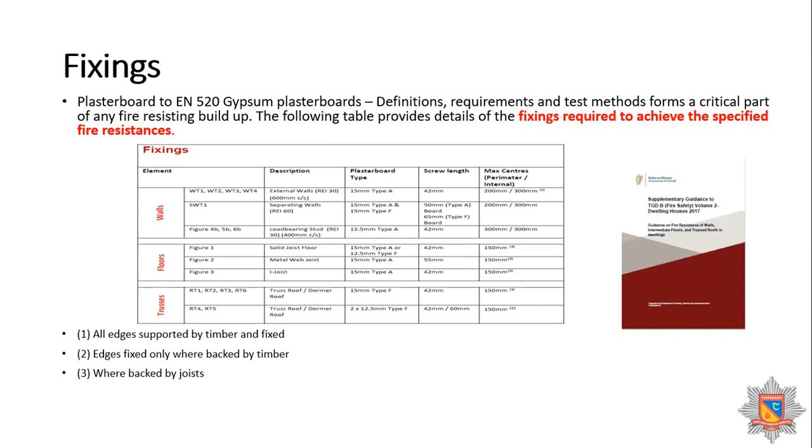For anyone who isn't aware, the National Building Control Office are actually running a full day on Part B dwellings. They're copying us basically, but they're running it for an entire full day next week on the 24th of November. If you go onto the Eventbrite page, or even if you Google NBCO Eventbrite, you will find a link to it. As far as I know, I think it's a free event. And I think for consultants or builders or anything like that, you can just join by Zoom. I think the venue, the Horse and Jockey, is just for building control officers and fire officers, as far as I'm aware.

But well worthwhile going along. They'll be getting into much more detail than what we've tried to cover here in an hour, because we don't want to keep you here all night. But if we have any questions or anything like that, we're more than happy, myself and John, to take any questions. Has anything come through on the chat?

No, there was a question there on the availability of the slides. So we will share the slides alongside the YouTube recording of this on the website.

As Martin said, this is not meant to be an educational session, it's more an awareness session. That actually we want to raise awareness. And as we meet you outside on sites, we absolutely mean what we said at the start. We want to work in partnership with yourselves, and we all have the same interest. Nobody wants to go along and have a building that's actually substandard versus the regulations, and the regulations are there for life safety.